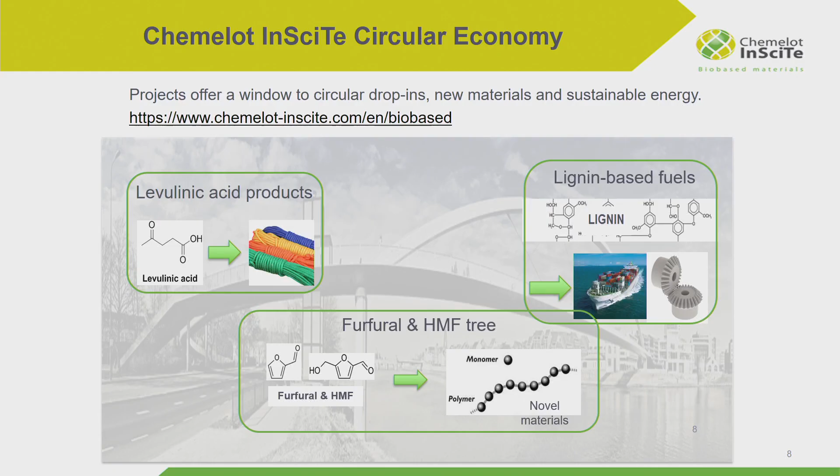We can go to lignin-based fuels. Lignin is often a critical, let's say, a fatal raw material, but if you can liquefy it, you can make ships sail on this. We can also valorize hemicellulose by intermediate furfural or hydroxymethylfurfural, making very special polymers.

We can think about high performance bio-based polycondensates with smart additives, making them stronger with high tensile strength, for instance, but other properties as well.

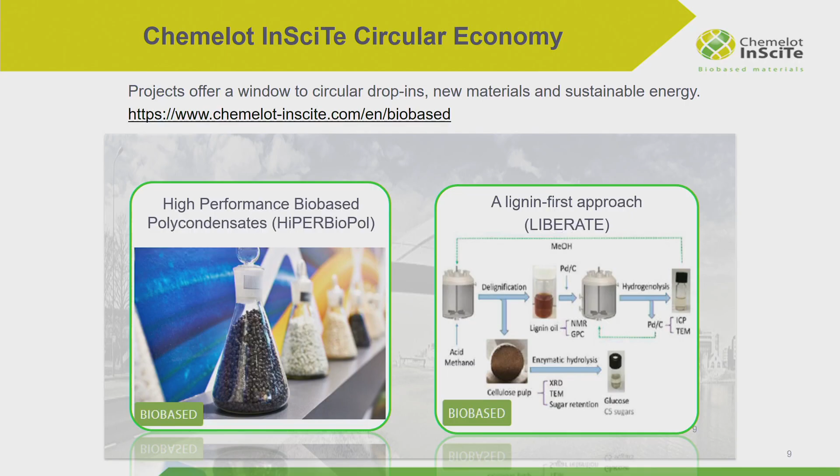Lignin first approach resembles the paper industry, but now not cellulose, but lignin is the most important starting material, and also there we can make great things from this. This project is successfully running at InSciTe.

We can think about bio-based and circular engineering plastics. That is, to start with recycled PET from bottles and upcycle this by putting in nicer soft blocks so you can make better quality plastics out of this back again for reuse.

And we have also lignin, but not as a fuel, but also as a plasticizer where you can mix it with other materials. So this is just a very short view on the projects InSciTe is doing.

The other company I'm representing is InnoSyn. InnoSyn is, let's say, the chemistry competence of DSM, which became an independent company 3.5 years ago. And InnoSyn has a number of expertises.

We do a lot in catalysis, biocatalysis, homogeneous catalysis, heterogeneous catalysis. We combine this also in flow chemistry, where we can design complete reactor systems. We do photochemistry, we do special crystallizations, also for pharmaceutical products. But last but not least, we are also driving the bio-based and circular expertise at InnoSyn.

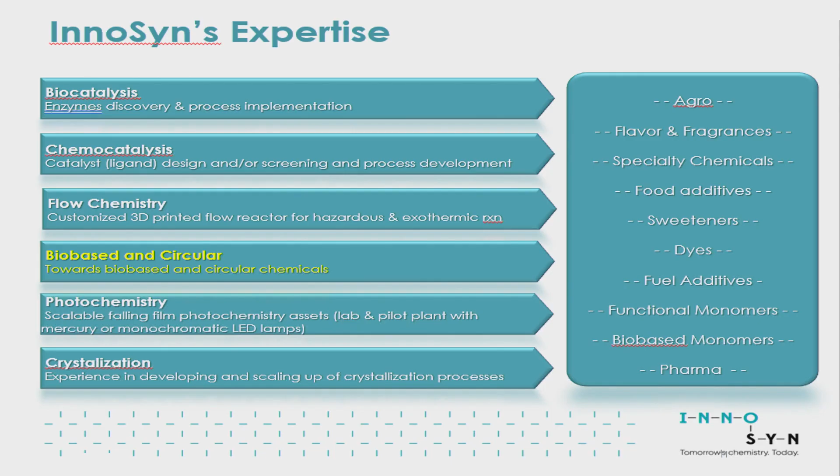And you see on the right-hand side of the slide, there's a lot of customers. InnoSyn does chemistry. InnoSyn is a one-stop shop. We start with ideas, but we can take the ideas up including implementation in chemical plants because of our industrial expertise and experience.

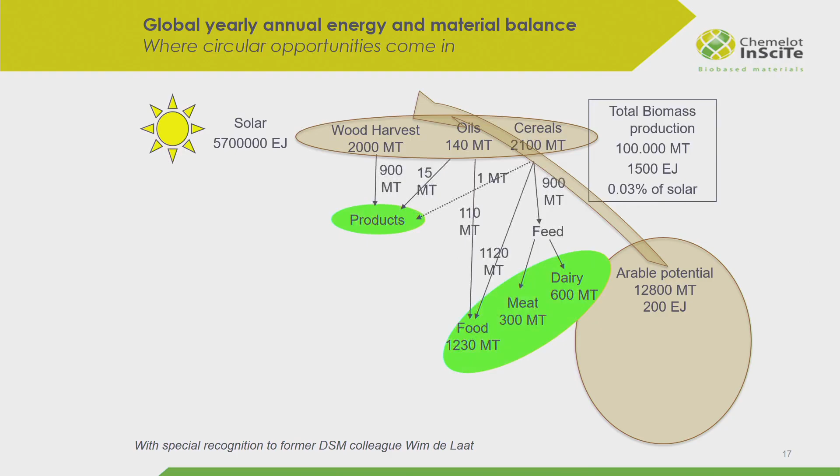This arable potential is also, again, a small part of the total biomass production. And from this arable potential, we create our food and our materials. At least we did that 2 centuries ago. And this goes to products, to dairy, to meat, to food, houses, building, etc.

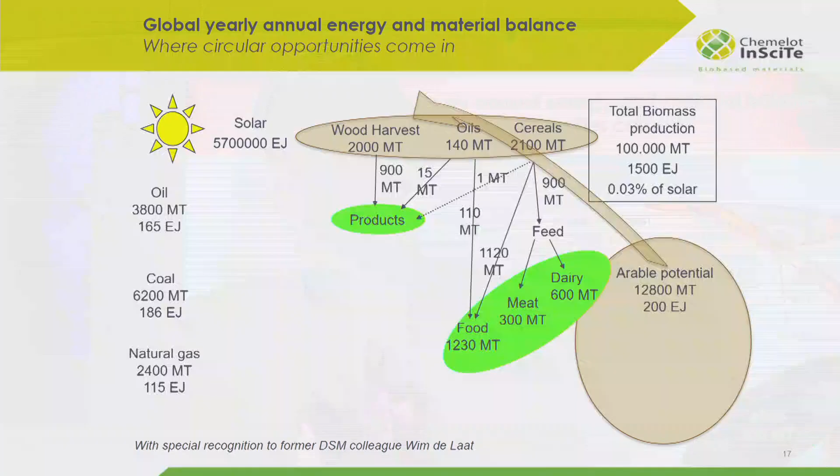This was about the situation around 1815 or 1900 or something like that. Then we started digging and drilling, getting in fossil feedstock - oil, mineral oil, coal, and natural gas. And these resources are at least serving a lot of our energy and some products - heat, also liquid transport fuel, and also some products like plastics, etc.

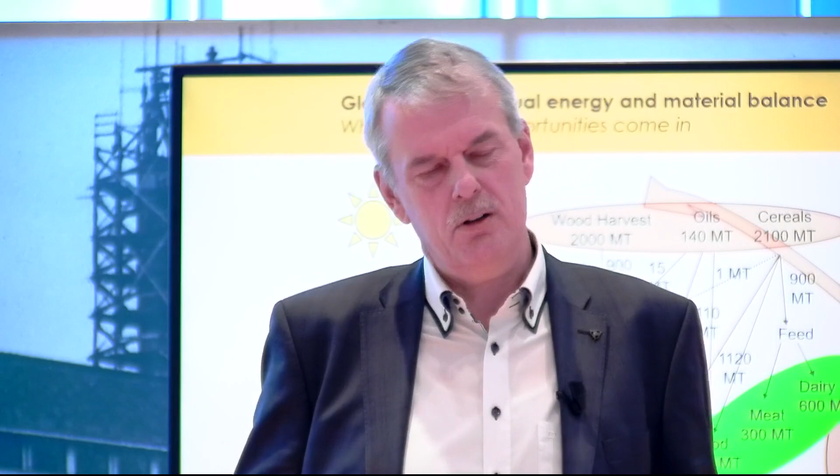So we started, and it's really starting, to have some green electricity - hydro, photovoltaics, windmills. That's about the situation today. We also like to use bioresidues, the fatal biomass, which is, I would say, not really useful for other purposes. And I think that's a very big opportunity.

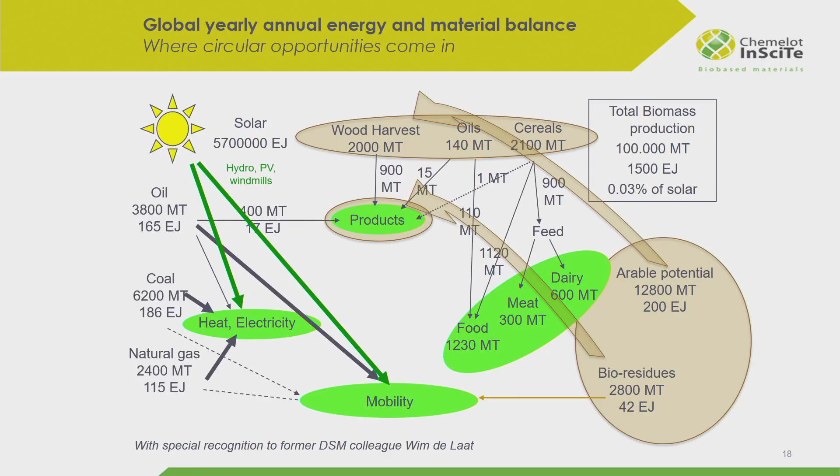If you're going more and more circular, the red arrows will disappear. We will not use energy from the land anymore. We will go to electricity and mobility directly created by the sun. And if we do that, it becomes more and more, and in the end, also the fossil needs disappear. So this would be the idea of a really sustainable world. Energy comes from the sun, materials come basically from biomass or circular sources.

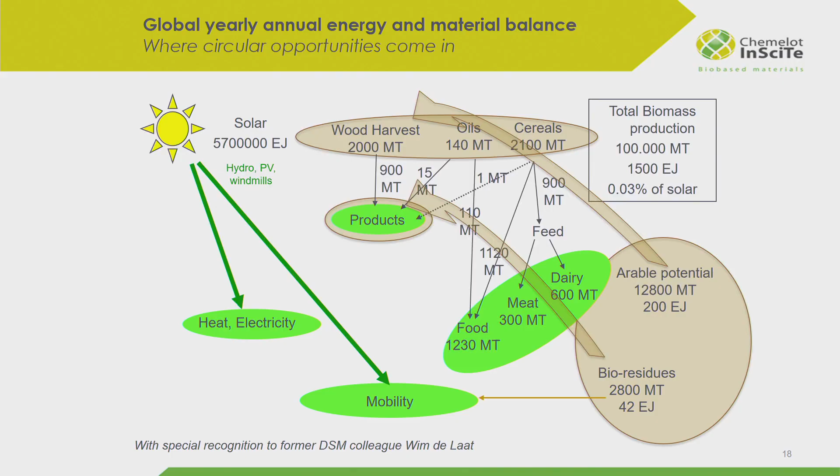Looking at feedstocks, we have a lot of bio-based and circular feedstocks available at our disposal, enough to serve our material needs. Think of woody biomass, lignocellulose. I'm not talking about trees, I'm talking about forestry and management, meaning that we are well maintaining the forest. If you maintain the forest very well, it does produce a lot of branches or dead trees. And these, for chemistry, it doesn't really matter. You only need the structure from these trees. Natural oils, aquatic...

Seaweed, for instance, or algae. Biodegradable residues, like what you throw away at home - let's say the leaves from the food, etc. Plastic recirculates, municipal solid waste, side streams of processing industry, also paper industry. There's a lot of useful side streams for chemistry. And last but not least, engineered recirculates.

That's really what's called assemble to disassemble. So if you're putting together a product and you're thinking ahead, it can be easily taken apart - it becomes also easier to recirculate and use it for high value applications again.

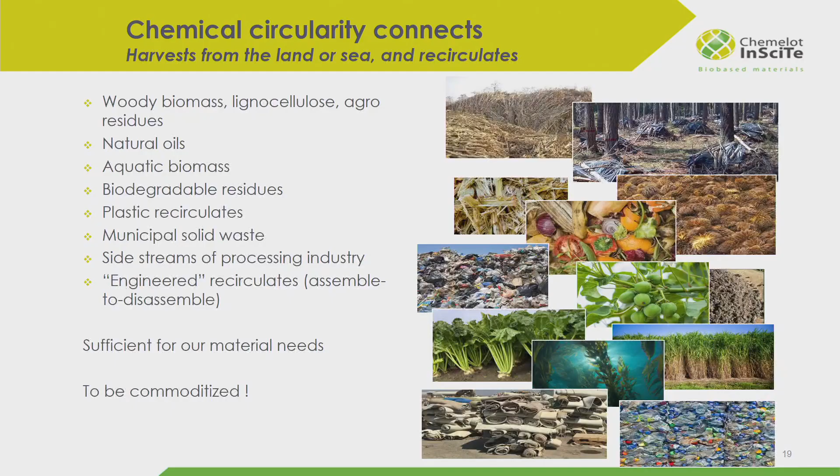Yeah? These feedstocks look very nice, but they are quite voluminous, and they are not very stable. If you leave them on the land, most of them rot away. And rotting away means methane creation, which is a lot more damaging gas for the climate than CO2, about 25 times. So that's not the way it goes.

So if you are not allowing this, and you're processing this to commodities, densifying it so it can be transported, then you're making a good step. And that's really the gate for access to the chemical industry. I will come back to this later. So if we have these bio-based biomass and bioresidues, how can they connect to chemistry? Well, I have a number of examples.

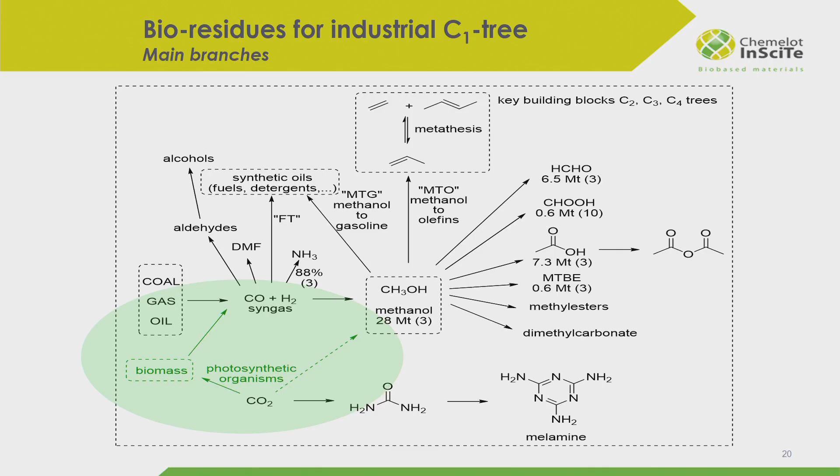This is what we call the C1 tree. This goes via methanol, so you can make synthesis gas, then make it into methanol. Methanol is a point of entry to the key building blocks from which we make plastics, a lot of volume. The very nice story here is that this is also a very economic route. We can make green methanol as cheap as today's, meaning we can make a transition without too much variable cost. You have to add a lot of capital, of course, to make it happen, but it is quite possible in the end.

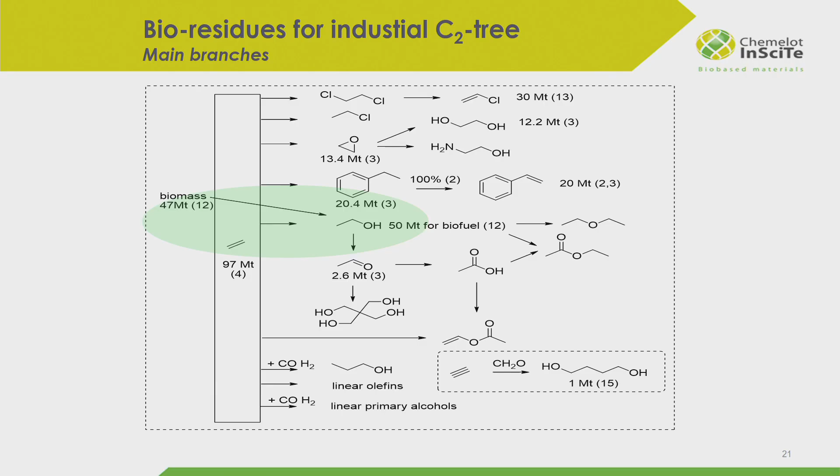The C2 tree goes primarily via ethanol. Ethanol can go directly to a number of specialties, but mostly you need to dehydrate it to move it back to ethylene, and ethylene is a component very well known in the fossil industry, which can also connect over there.

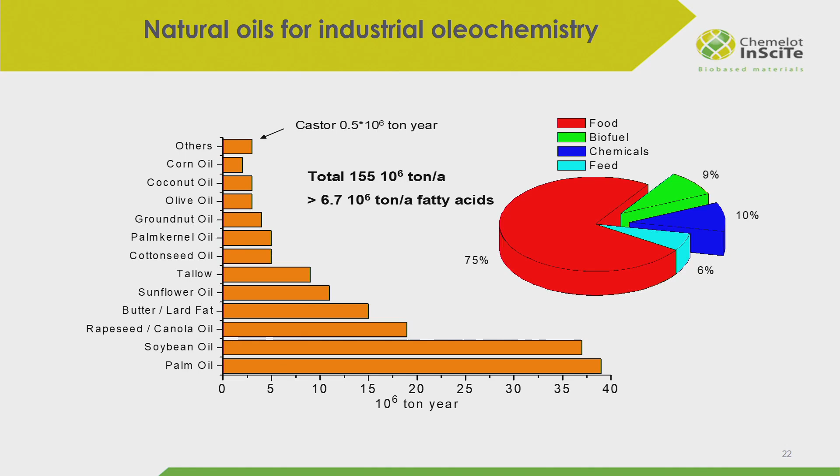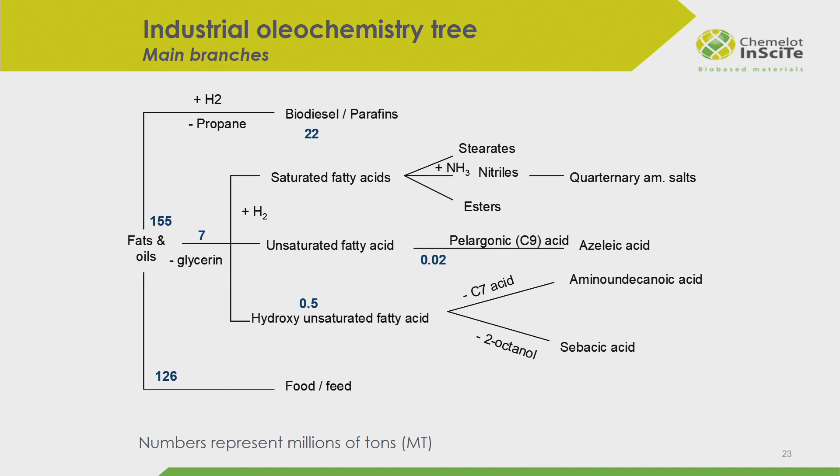We can also think about natural oils, meaning a lot of food, of course, which is not what you would like to touch upon. But there are some oils which you cannot eat, for instance castor. 10% of it is already dedicated for chemicals, and if you see what kind of tree this feeds - and that's only a small example, the tree is much bigger than this - you can make C9, C10 acids from this, like azelaic acid or sebacic acid, and also a lot of other specialties, which is, I think, a very nice bio-based entry point for the chemical industry.

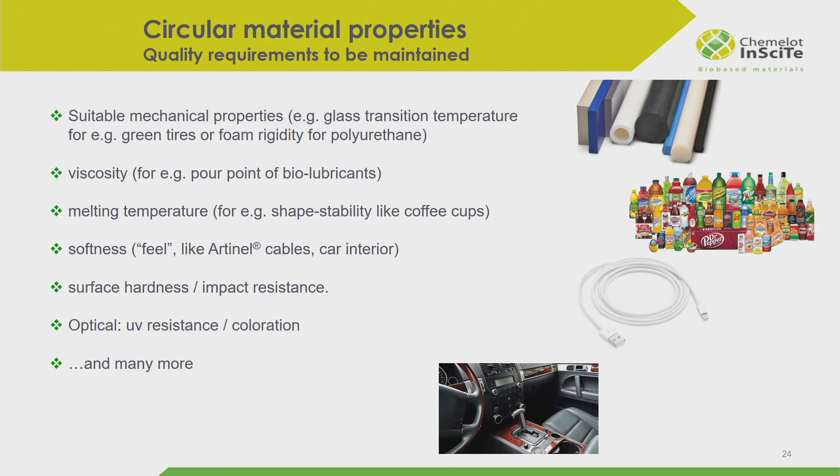And in the end, this goes to materials, and these materials have a lot of properties and quality demands, and they are pretty stringent. You can think about packaging, cables, car interiors, or insulation stuff, etc. But the properties must remain the same. So you can go bio-based, yes, but in the end we want the same chairs, the same tables, etc., and the same car interiors without any quality deterioration. And that's, of course, a very good challenge.

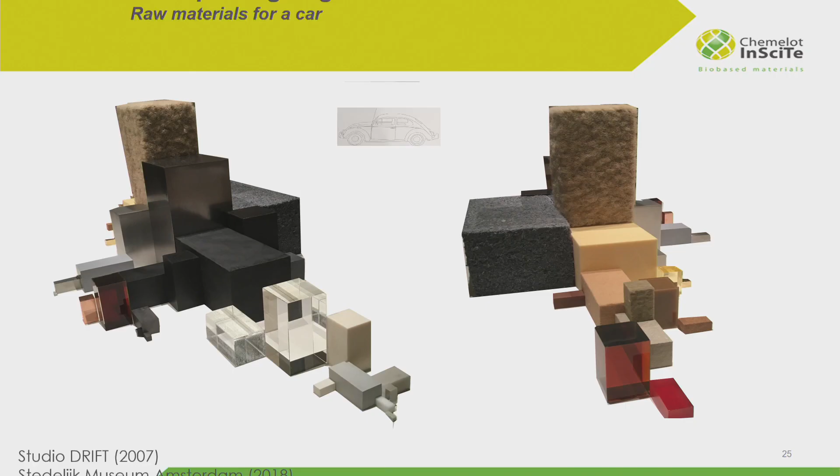An example is - I like this picture. I was some time ago in the Stedelijk Museum in Amsterdam, and they had a nice exhibition about raw materials. This is a picture taken from two sides by me, and it represents the raw materials of a Beetle car. What this company did - these are really artists - they took a Beetle car apart completely, separated all raw materials, and collected them in these cubes. This is then presented. They did a lot of other stuff, other user goods, but this is the way it goes.

Now, the nice thing is that they also add a list of raw materials in weights and kinds. And from this list, well, we have an educated guess of what is the carbon footprint of each raw material of this list. Iron ore, for instance, must be gained in a mine, purified, transported over the world, go to steel making, and do a lot of things over there as well. So it has a pretty high footprint.

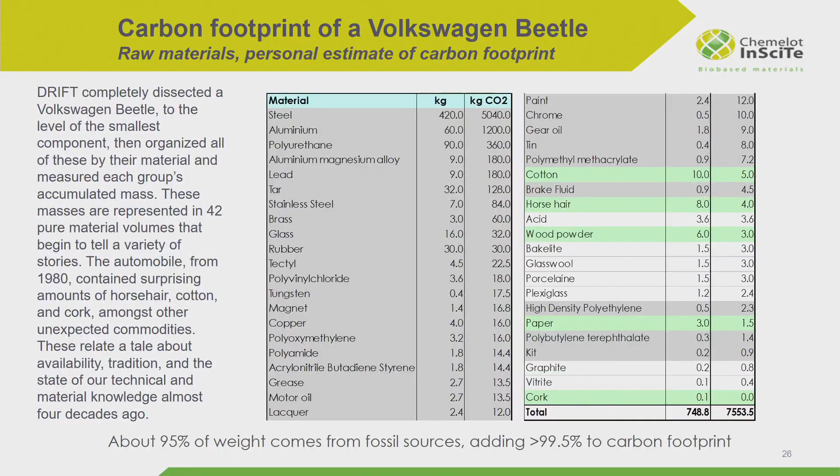And if you add all these things, you get a list, and then you could already conclude that about 95% of the weight of that Volkswagen Beetle came from fossil resources, only 5% from other sources. And the carbon footprint is caused 99.5% by fossil resources. So in the end, on the right bottom side, you see two figures, and this concludes that 1 kilo of that kind of car will produce about 10 kilos of CO2 in the atmosphere.

So what is now the road to circular materials, and how does circular complement bio-based? I like to put this into this picture, and again I was inspired by a former colleague, Gerard Werumeus Buning. In fact, when you start with a fossil raw material, you start with a carbon footprint of 3 - I'll come back to this number, it's a very easily derivable number. In the first steps of the chemical process, you go from fossil raw materials in the end to user goods, but in the beginning you create a lot of footprint and you do not create a lot of value.

When this process proceeds, you create more and more value until you get your good. But if you are combusting it, which is what we do today, you actually destroy value. You just recover a little bit of energy, but that's really not much.

What you can better do is go bio-based. You can make naphtha, base chemicals, or monomers from bio-based sources, and then you already win at least 3 kilos of CO2 per kilogram of product.

You can also mechanically recycle it—that's the blue area, the blue arrows. On the top right, you can go a bit fiercer with chemical recycling, where you really take the monomers apart. And in the end you can go even more fierce, almost like burning, but leaving out a little bit of air—that's pyrolysis and gasification.

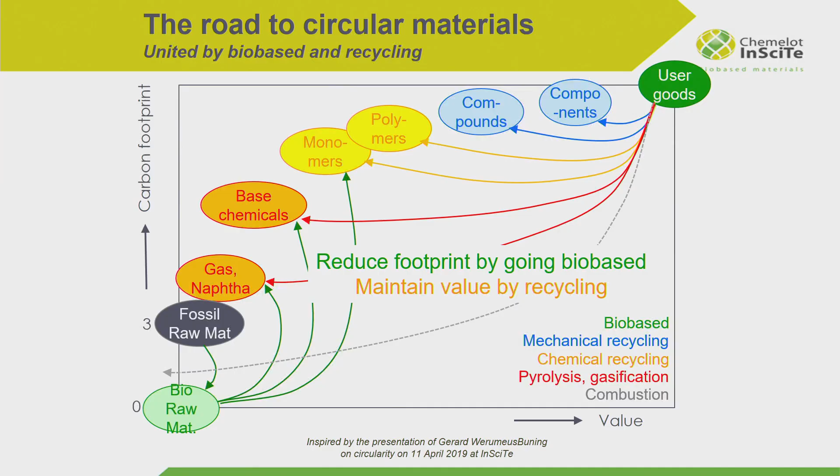This is how circular recycling and bio-based complement each other, and this is what makes sure you create the most value. If you first go bio-based, you can reduce your footprint, but you can also maintain your value through recycling—keep it up as much as you can. This is, I would say, the way we can really run this planet.

So what does a sustainable world look like? What are the basic insights I gained—these are all open for discussion, by the way. But these five items do at least make sense to me.

First, in a sustainable world, energy should come from energy sources, and materials should come from material sources. That sounds very logical, but trying to make products from electricity is actually economically less attractive. That's what I found out, again, during a lot of discussions with other people.

Energy is by far the cheapest sustainable source. Electricity is by far the cheapest sustainable source—that's also very important to know, and it's also very good news, by the way. So you should maximize electrification.

Of course, there's one exception. Electricity takes batteries, batteries are heavy, and you cannot take them into the air—this calculation doesn't fit. So you really need kerosene, the fuel for aviation. These can be made from bio-based sources, but it's only a small amount related to the total fuels we are currently using in the world, about 7%.

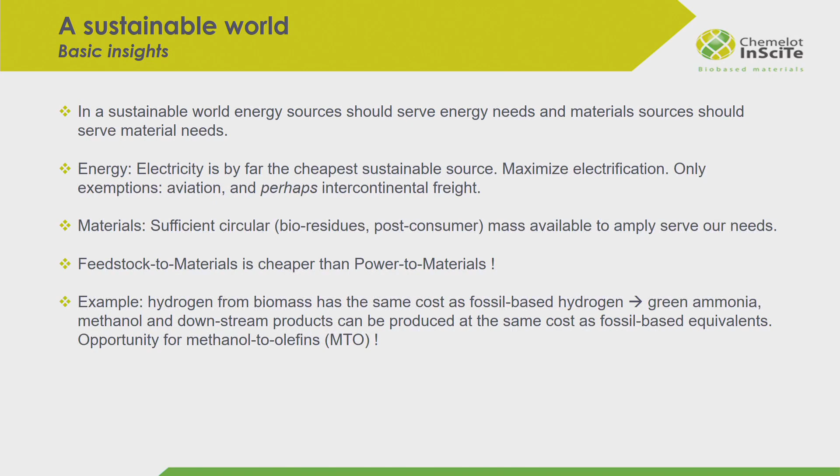Feedstock to materials is cheaper than power to materials, and as an example, in the next slide I'll show you that you can make hydrogen from biomass and hydrogen from other sources, and compare them. Hydrogen is a very important intermediate for methanol and ammonia, which go into other products. There are much more extensive studies available with many more technologies, but this one I could create because I know a little about green hydrogen from electricity.

I also had a very good discussion with Torkol and Torrgas, and with the BRI2 project, which claims that hydrogen from biomass is very interesting—not only in cost price, which is about the same as current cost price at maturity, but especially in carbon footprint.

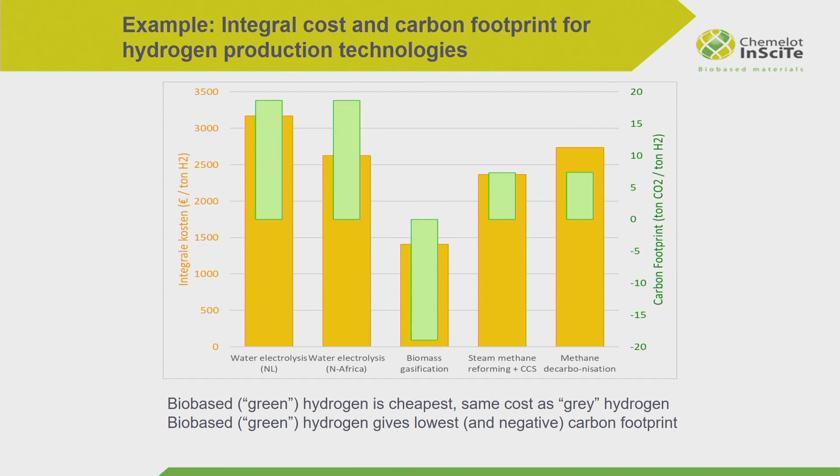It's not carved in stone, but for me all this evidence is piling up, and I would really like to see new projects coming with green hydrogen.

So if you are going from bio-based value chains into products, you start with biomass—very broad, it can be anything: lignocellulosic, natural oils, the whole list I showed a few slides ago. This biomass should be treated so that the most valuable products are taken out first, like the crops and proteins—that's normal agrochemistry or agricultural operations. But at the end, you will always have residues in your hand.

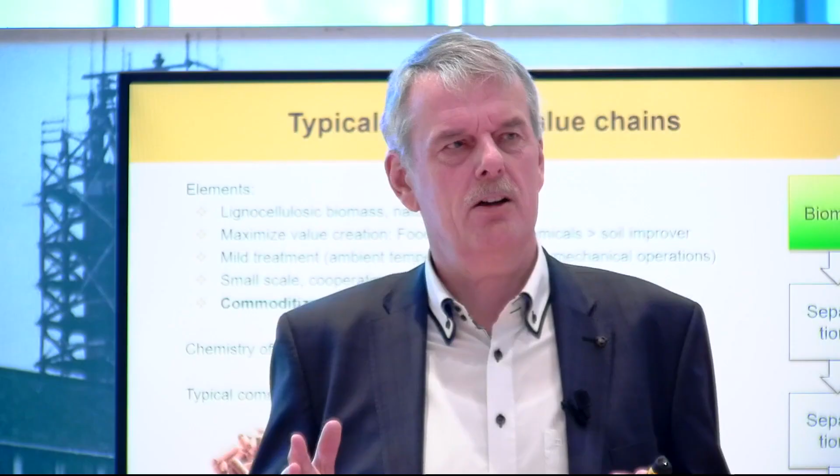These residues can be commoditized and separated into, for instance, feedstock for chemicals—typically carbohydrates or natural acids—or used to make soil improver, carbon, or salt. At the farmer level, this is typically a small-scale operation: you do your crops and process your residues with a mild treatment, mostly mechanical, like sieving, milling, or filtering.

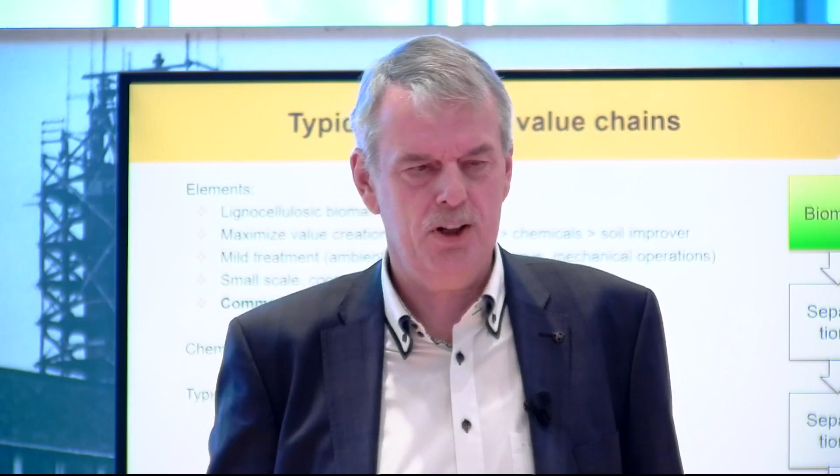Meaning aqueous, low temperature, no acids, no bases, no chemistry. That it's very cheap. These plants are really inexpensive, related to the steps after. Then you bring your residues to a typical chemical site, and there you do the chemistry. And why? Because of economy of scale.

Because these installations are darn expensive. You use solvents, you use acids and bases, you use high temperatures, high pressures, and all that must be operated in this plant. So that's why you bring this together. But for bringing it together, you need to transport. You need to commoditize.

The chemistry would like to have all year through access to the same quality of raw materials. That's the way we operate, and that's possible. But you need to commoditize. It has to be, of course, good price.

But if you are making it more dense, the logistics become cheaper. In one lorry you can take much more kilos of biomass if it is densified than when it's not, and then you can make some good economics out of this.

Examples of commodities, from the whole picture list I showed you a few slides earlier, you can think about pellets, wood pellets. You can think about oils like naphtha, bio-naphtha, or melasse, when it is sugar. These are just depicted on the left bottom side.

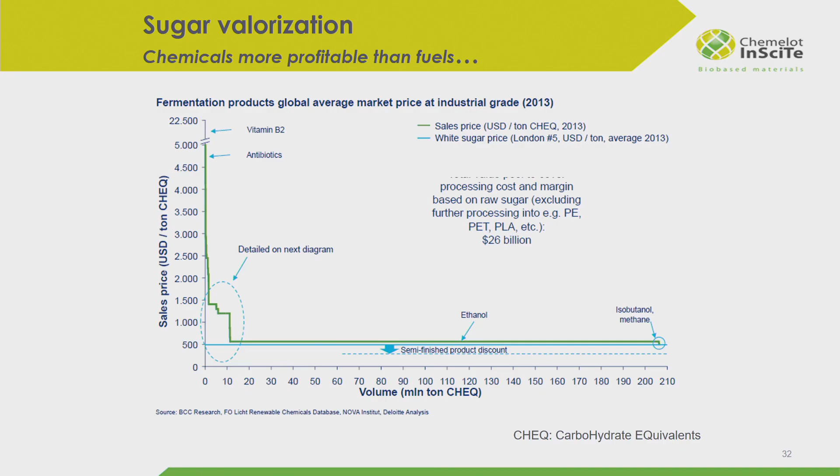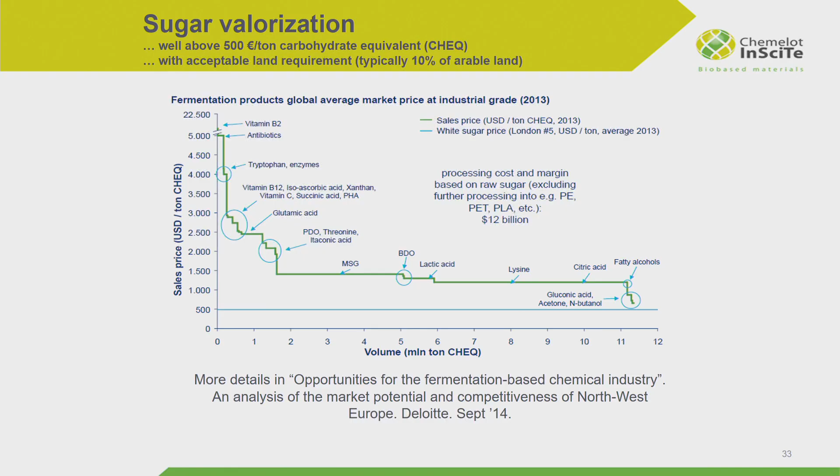But on the left-hand side, you see still basically a lot of fermentation products which are still interesting. I investigated already in the past succinic acid, as told in the introduction. But you see here there's a lot more valuable materials you can make, you can create from sugar by fermentation, and this is just an overview. So I think fermentation is a very important area to green your processes, because they use sugar anyway.

Now I come to this example of this deeper dive. I will not dive too deeply with you, otherwise we will run out of time, of course. But first of all, I really like this picture because from wood you can...

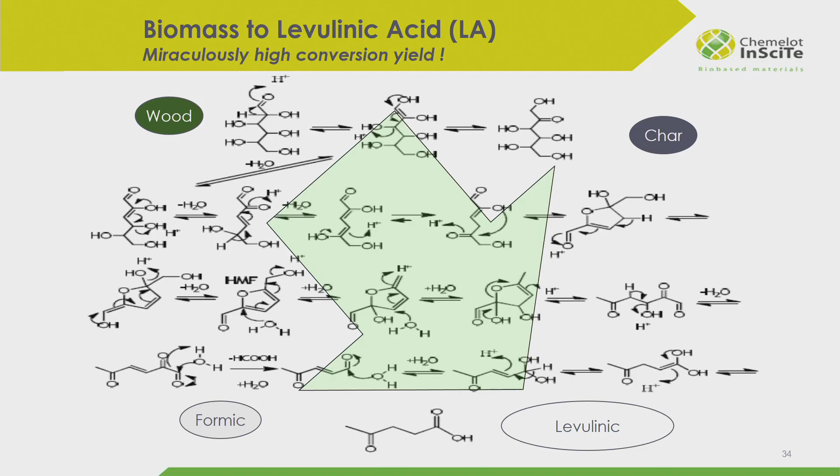From the sugars from wood, you can make levulinic acid in an astounding, I would say, efficient way. About 7 out of 10 sugar molecules are converted to levulinic acid via this very comprehensive scheme, while also co-producing char and formic acid. And this can lead to a lot of value creation, and this is what we would like to, what we also investigated in DSM, and we came with this kind of process.

You come in with biomass. You will add some acid and some water. You cook it, like in the paper industry. You make your levulinic acid.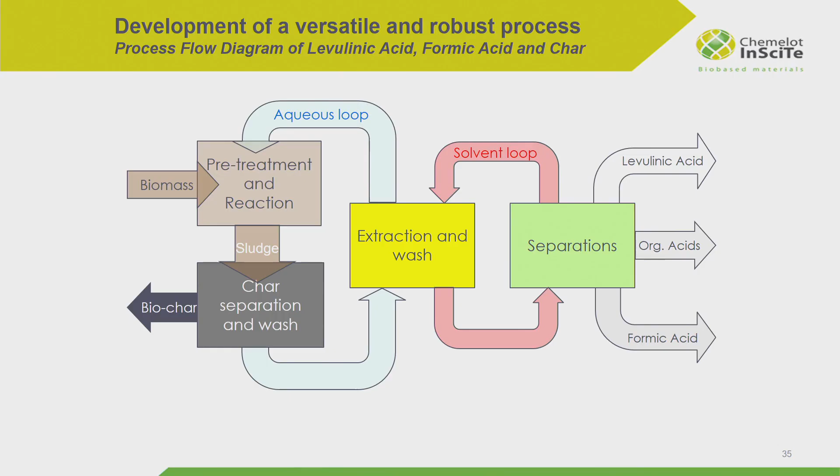You separate your char, extract your products, and distill them off, and you make levulinic acid, organic acids, and formic acid. And of course, the cheaper the raw material becomes, the cheaper your product will become.

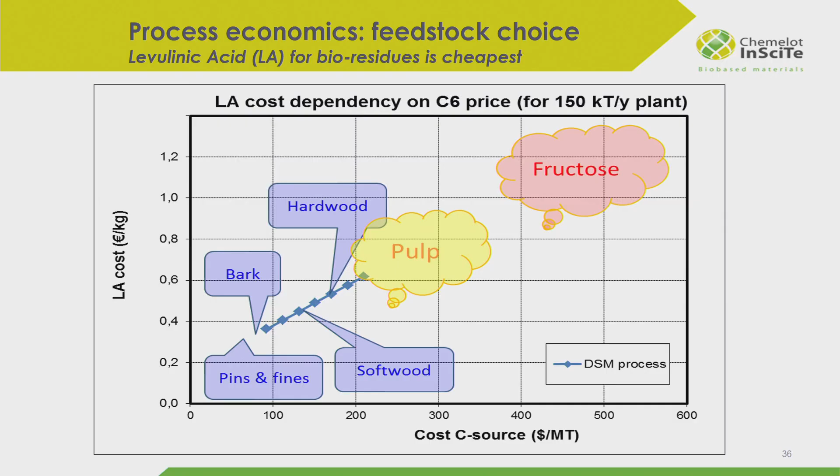That's also what we really recognize in DSM. We don't like to use fructose because fructose is very expensive, and that means your levulinic acid will be expensive. Pulp is better, but not good enough. If you go to woody biomass, especially the rejects, like the residues, the pins and fines or the bark, which are not of much value, then you can really come up with very cheap levulinic acid.

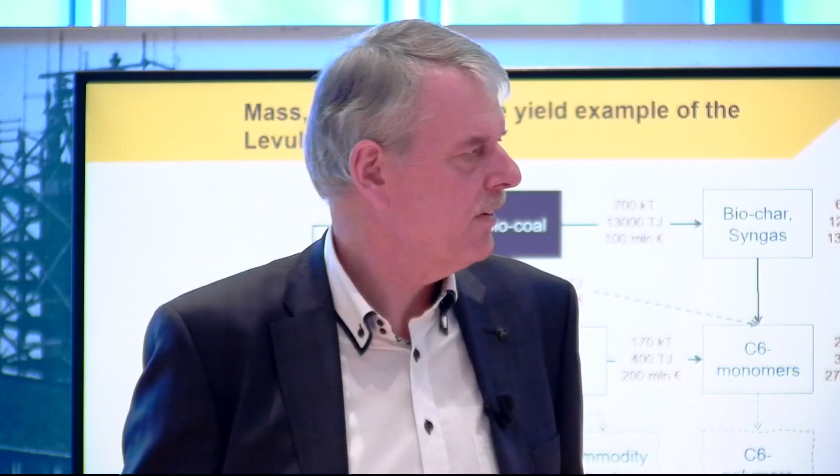And then you can create, I think, also a nice value, and that's also depicted in this graph. When we start with commoditized biomass, rated at €120 per ton, which is a fair price, and make via levulinic acid, formic acid, and biocoal, you make biochar syngas, you make C6 monomers via a number of intermediates. You see on the figures the volumes, energies and value, and you can easily deduct that you have a lot of value creation, about 250%. Every euro you put in, you create €2.5 of products, which I think is a very good starting point for a business case.

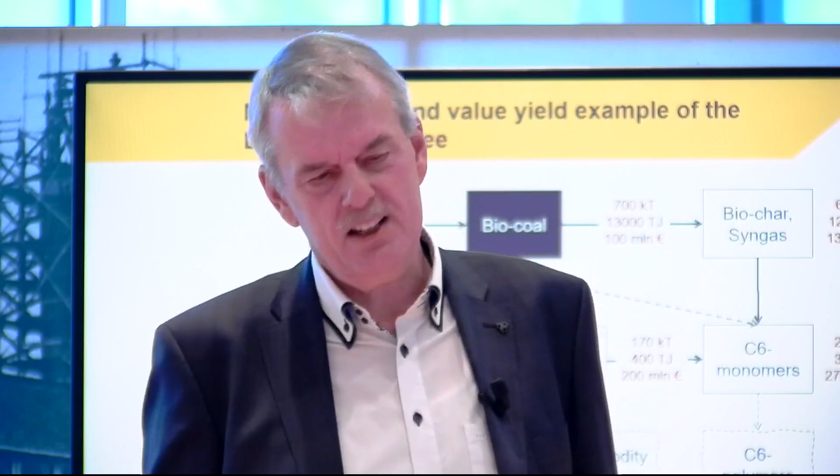And why? Because your energy yield is very good. 50% is a marvelous energy yield, and the carbon yield is really great. And that makes this value creation possible.

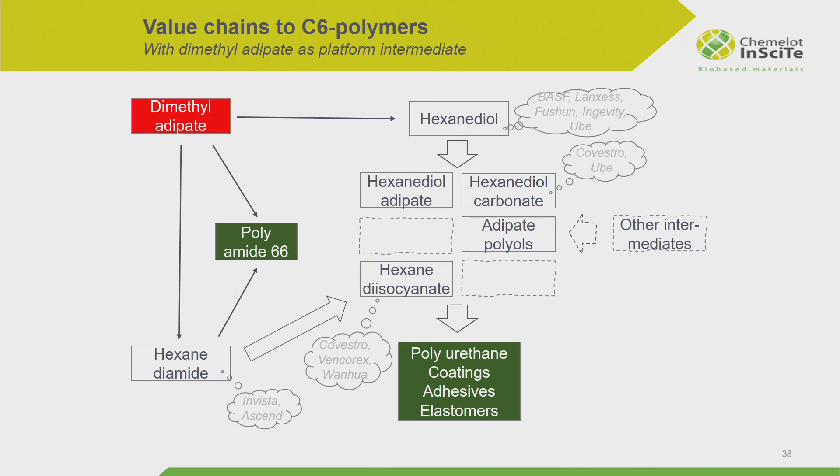Well, if you talk about C6 monomer, think about dimethyl adipate, you can go all kinds of directions to materials. You can make HMDA, hexamethylenediamine, you can make hexanediol, you can combine it to nylon 6,6, but you can also combine it with other intermediates to other polymers, like polyurethanes or diisocyanates, and these can be applied in polyurethane coatings, adhesives, elastomers, etc. This is, I think, very nice, and this is a very active project in InSciTe, and we really try to interest the industry for this.

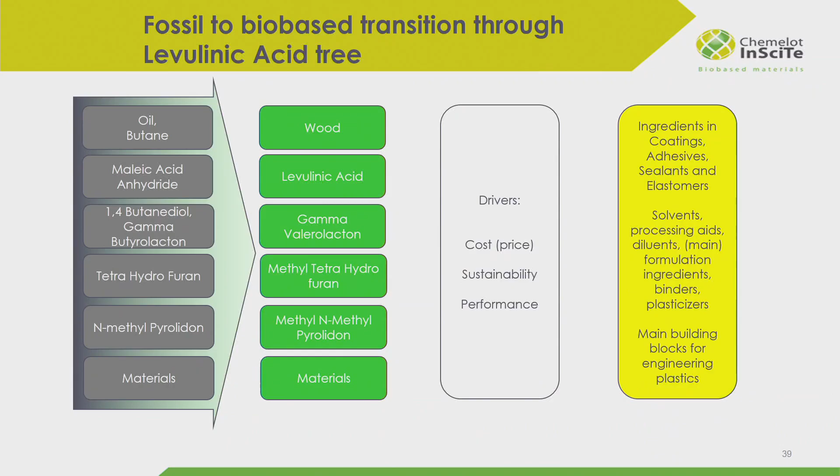So if you look here on the left-hand side, you see from top to bottom a value chain towards materials from fossil feedstock. The green ones are the bio-based equivalents, not exactly the same materials, but really resembling. What we like to do is make ingredients in coatings, adhesives, sealants, elastomers, etc., and make building blocks for engineering plastics. The driver to go from fossil to bio-based is, of course, cost. Often cost and sustainability go hand in hand, and performance.

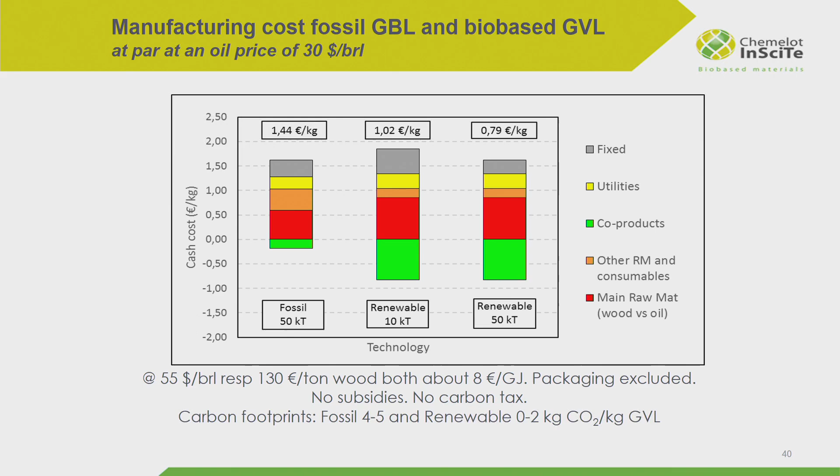And why is that? Because you make a biorefinery. You create a lot of other co-products which have value in the market. So that is the secret of the value creation. This makes it possible that you start from levulinic acid to make some intermediates which can already have nice applications, and you can grow towards bigger products like caprolactam, adipic acid, hexamethylenediamine, hexanediol, etc.

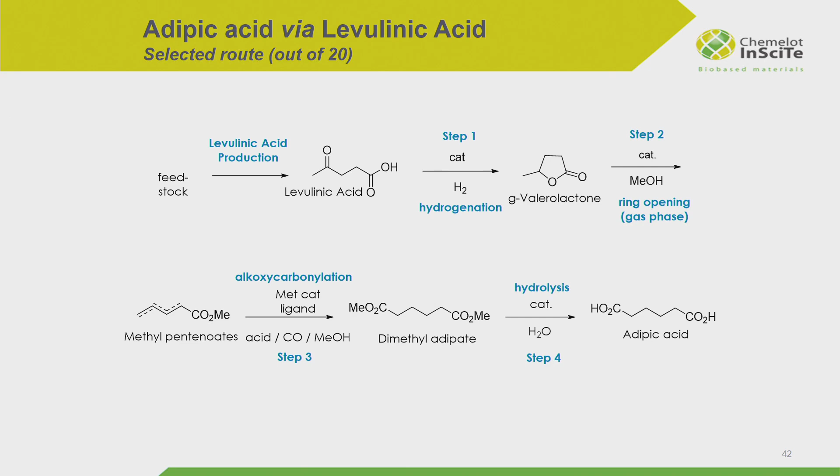Just one slide on chemistry, because it feeds the next slides as well. So we developed in DSM, from 2010 to 2013, this process, starting from woody biomass: levulinic acid, we hydrogenate it to gamma-valerolactone. We ring-open it to methyl pentenoates, the 3 isomers, and then we do a alkoxycarbonylation to dimethyl adipate, and then we can simply hydrolyze this to adipic acid.

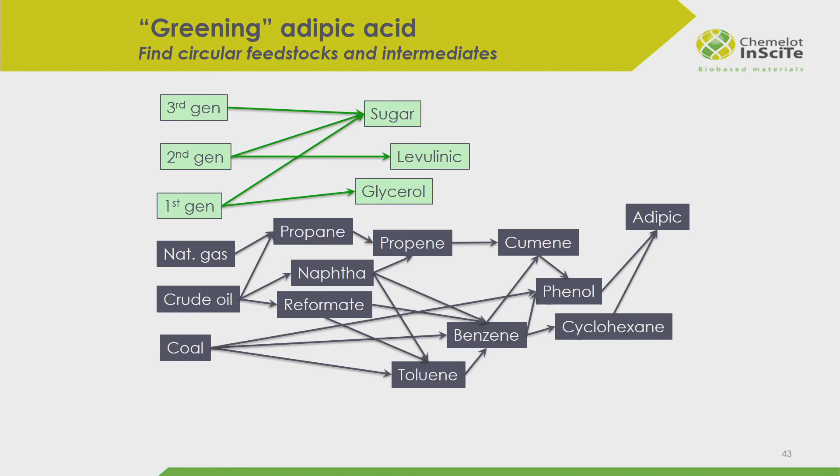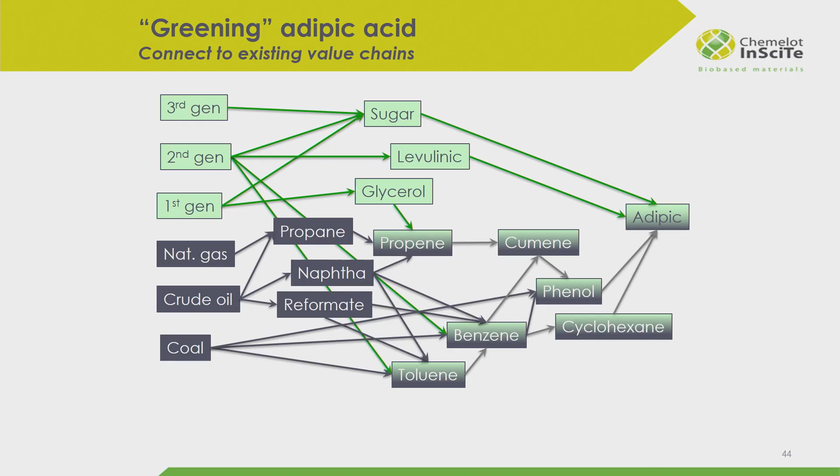And if you see how adipic acid was made in the past, it comes from natural gas, crude oil or coal. You have several routes to adipic acid. When you put the renewable adipic acid to it, then you see that sugar or levulinic acid can be a very good intermediate. I think sugar was some time ago a hype, I don't believe it's really possible with sugar. And then you can start with the interaction. The idea is that you're really slowly starting to replace intermediates with bio-based, greening up the processes in this way, and gradually your adipic acid can become green.

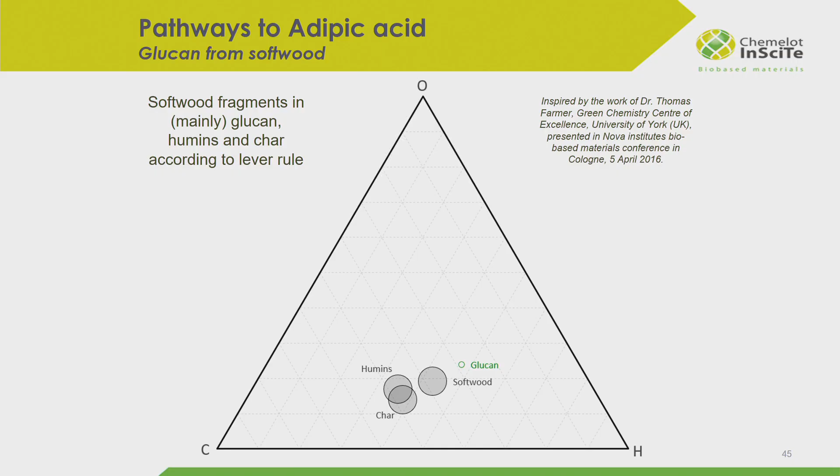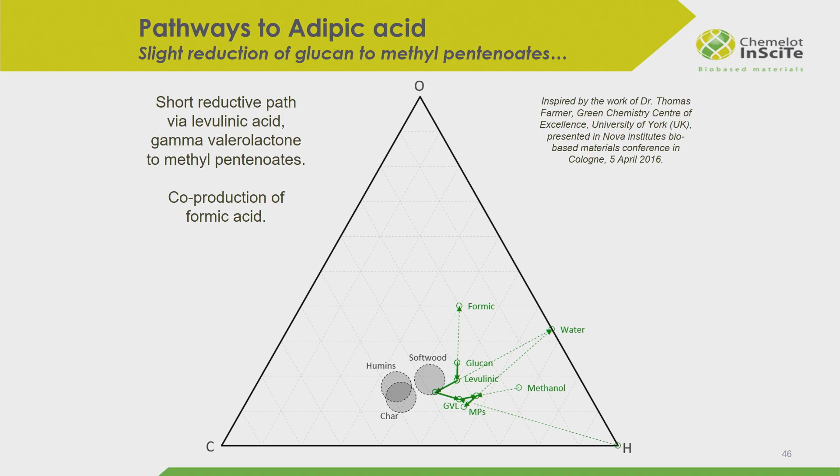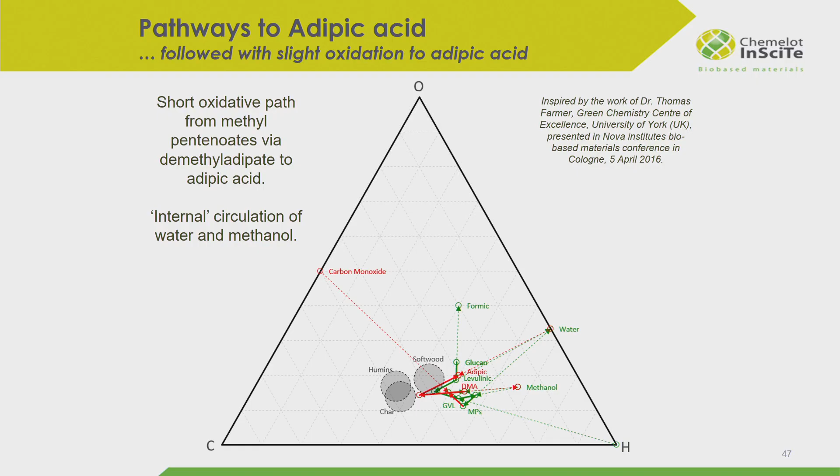What's nice is that you can really construct in this diagram your pathway towards adipic acid, starting from glucan, levulinic acid and formic acid, but also gamma-valerolactone and methyl pentenoates. You can continue with the red one - I changed color for clarity. You go via methyl pentenoates, dimethyl adipate, to adipic acid. What you see is that the pathway is very short: you don't have to oxidize a lot, you don't have to reduce a lot, you don't need too much additional raw materials, and you arrive at this.

By the way, I was also inspired to make these triangular diagrams because of the work of Thomas Farmer. He is at University of York. He presented a very impressive presentation where he has similar diagrams.

If you compare this with the fossil equivalent, you would start with reformate, go to the left bottom to benzene, then back to the right to cyclohexane, then to KA oil, and then to adipic acid. This pathway is about 3 times as long, and it needs a lot of additional chemicals, which is why it's relatively expensive.

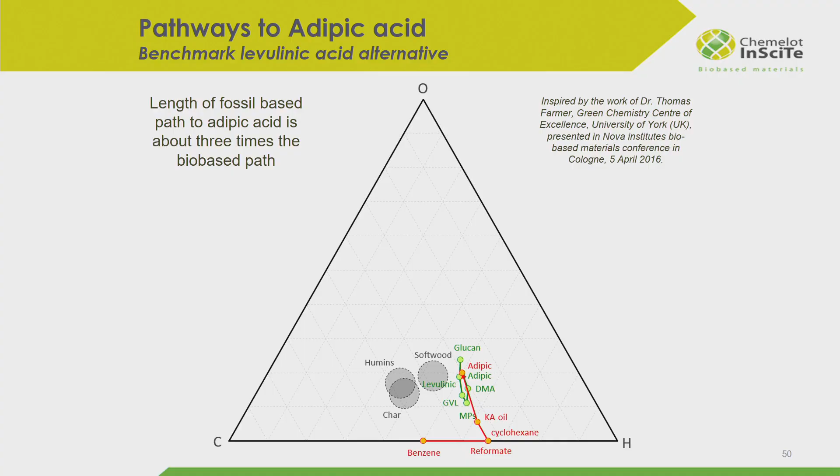So you can compare the two, and you see that the green pathway is a lot more attractive than the red one. You can see this reflected in variable cost.

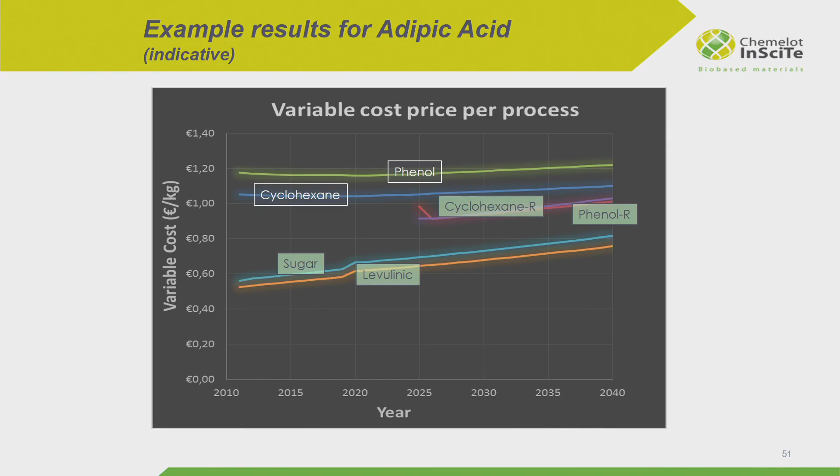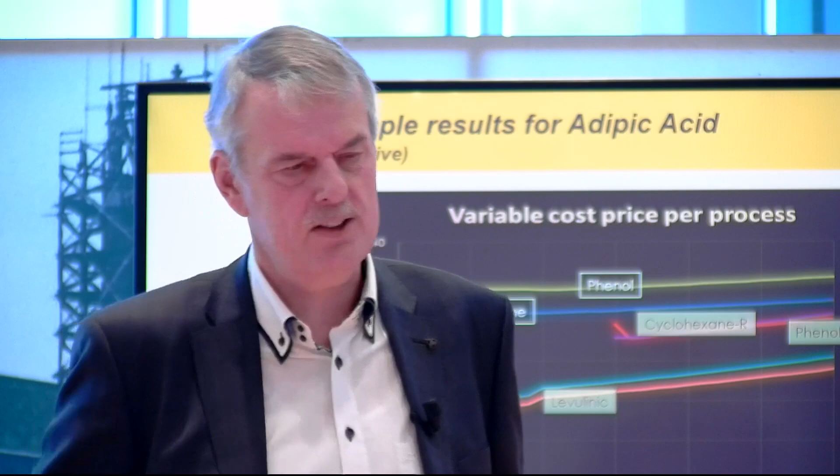We developed a model for that at DSM, which is of course very indicative - there's a big database behind it. You see that the cost price of cyclohexane-based or phenol-based adipic acid is around €1. You can green the cyclohexane and green the phenol, and then you have a little advantage. But if you reconstruct the whole chemistry and go via, for instance, levulinic acid, you'll get the best cost - about half of it.

The good news is the same holds for carbon footprint - often cost and carbon footprint are interrelated. So there too, levulinic acid and sugar are very interesting. You'd expect, because of this, that the market share of phenol-based or cyclohexane-based adipic acid will decrease in favor of the sustainable routes.

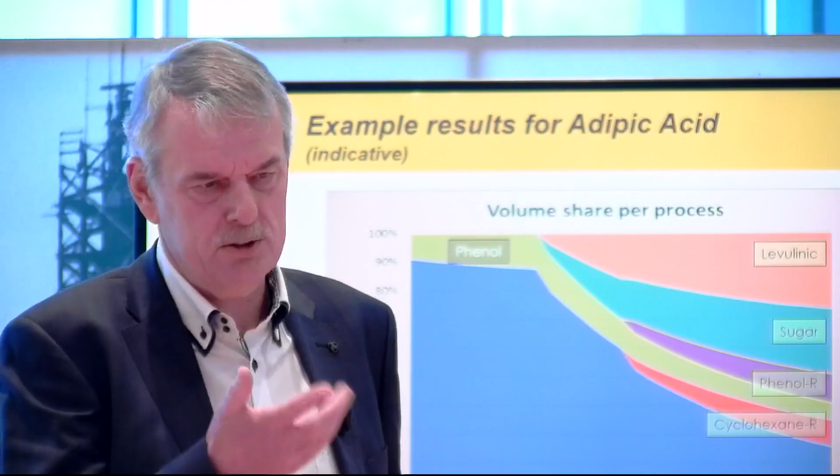Of course, the speed depends a lot on policy. The greener the policy is, the faster it goes.

Now, with the whole database, we can make some predictions. We had about 60 molecules we considered, and on the y-axis, the vertical axis, you see what kind of increased renewability we could expect every year. So the higher the bar, the more the process is prone to transition.

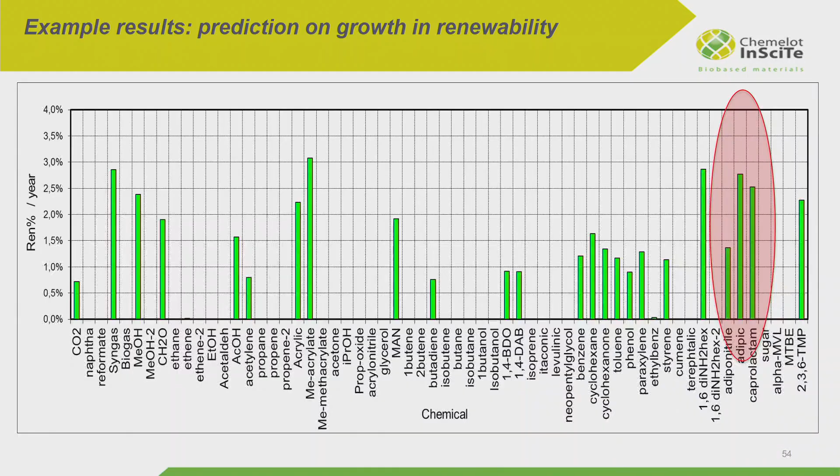So we just discussed the caprolactam, adipic acid, adiponitrile, etc. route, but you see there's a lot more opportunities - a lot of greening potential going on there. Yet it still hasn't happened. And why not?

That is of course the famous valley of death. You need a lot of money to build your plants, to do the piloting, etc. It takes too long, the incentive isn't there, there are no partners who can really go with you, supply assets have nothing to offer. That is where a lot of projects stand now, I would say, at the bottom of the valley of death.

It's not very positive news, I would say, but I think we are really at the beginning of this transition, and we should really do our best to make things happen. And we can do it.

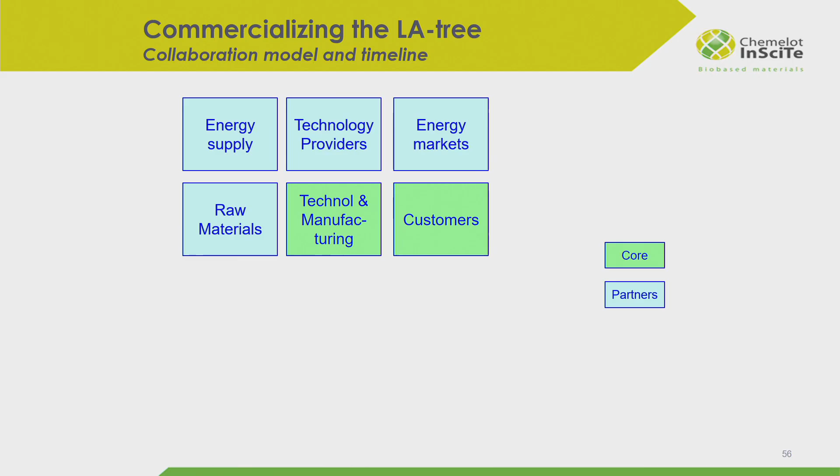If you are commercializing the LA tree, you think about technology and manufacturing of course, but you also think about customers - without customers, you can forget everything. So that's your core. You add your partners in energy, in raw materials, in technology, and you need a lot of support from all kinds of groups wanting society to make this happen.

And we see now there is some movement. We have very nice advice from our Social Economic Council in Holland. But in the end, you need this open innovation - that's really what you need, an excellent environment to make that happen. We are very well equipped in Holland, at least in this area, in Chemelot and Brightlands, to work on this, and we can really bring together partners across the whole value chain. That's what we need to make it happen.

From a technical perspective, I keep saying it's possible. We don't need time until 2050, not at all. We need 15 years. If we technologists say 2035, we can do it. But then all the lights must be on green, that's for sure.

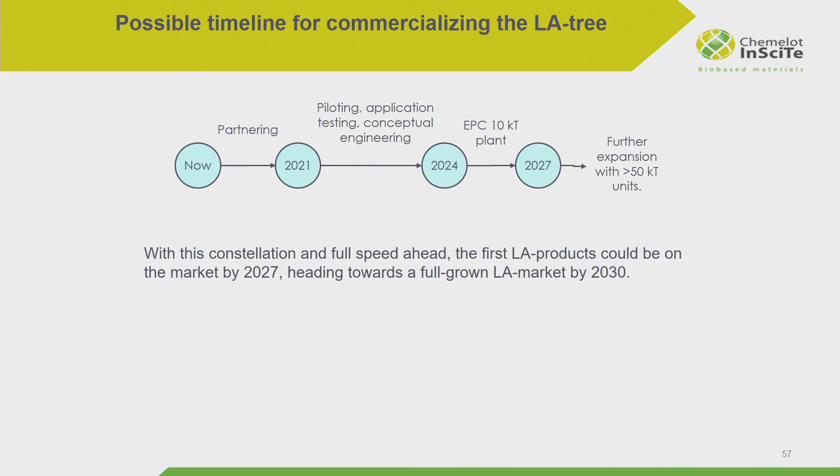The question is, of course, who wants to become a player? My opinion is that also such directions must be governed, must be set out by governance. So you cannot just ask industry, please green up your process, and then they say, yes we do, and in 10 years you're done.

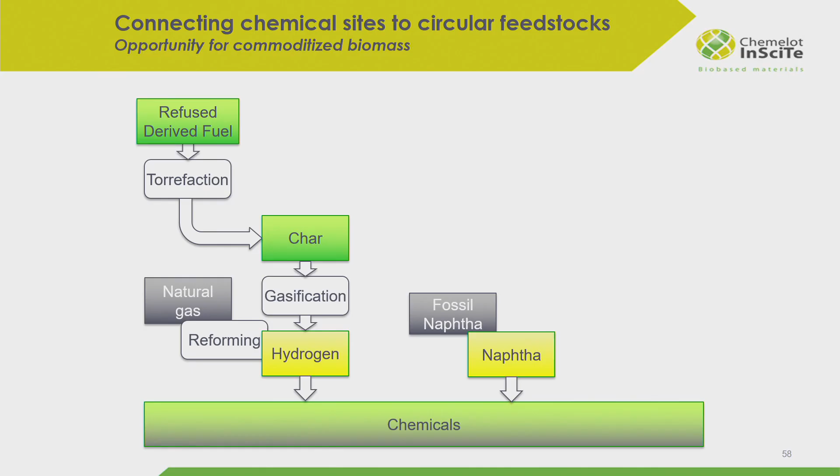Looking at chemical process industries, we have typically, example Chemelot, but I'm sure there are more sites like this, natural gas and fossil naphtha as our main feedstocks. How to green them? Now, of course, you can start with, let's say, refuse-derived fuel made from what you throw away at home. You can torrefy it, make a char, and this char you can gasify, and you will have your hydrogen.

That's one way. A second way, there are more, is that you use plastic waste. Also in Sabic we have some nice examples of this: catalytic pyrolysis, making char, also making liquid naphtha. Or you could say, like the levulinic acid case, you start with primarily biomass or a biofeedstock, catalytic conversion directly into chemicals and char, and this char you can gasify again. In the end, you can make the circle complete, make the transition complete, and be independent from fossil resources.

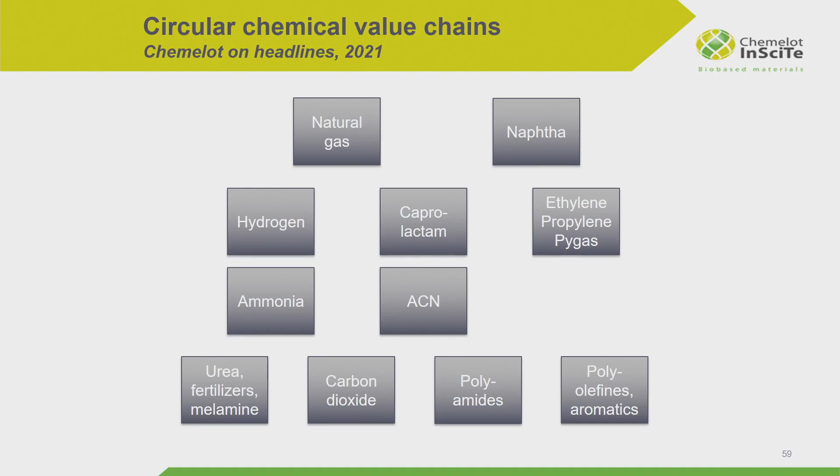So for Chemelot, it looks like this. We have natural gas and naphtha. We make hydrogen, ammonia from this. From ammonia we make caprolactam, acrylonitrile. From naphtha we make ethylene, propylene, pyrolysis gas. From ammonia you can make fertilizers, melamine, carbon dioxide comes also with it, polyamides and polyolefins.

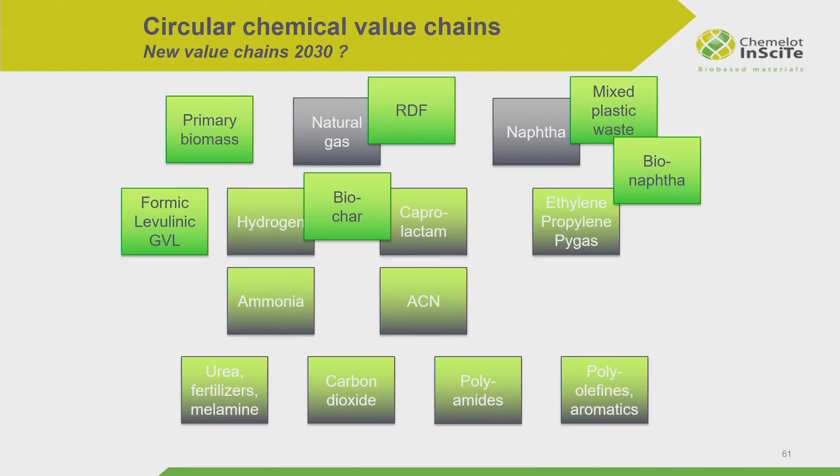Now, how to green it? Well, we can start connecting with biomasses. Then we can make the intermediates green, and in the end the plants, let's say the ammonia plant or the fertilizer plant, can stay the same because you just replace their feedstocks. That's all, that's the good news. You don't have to build the plants up again, we can keep using the assets. And in the end, perhaps in 2050, that is the ambition at least, we are completely green.

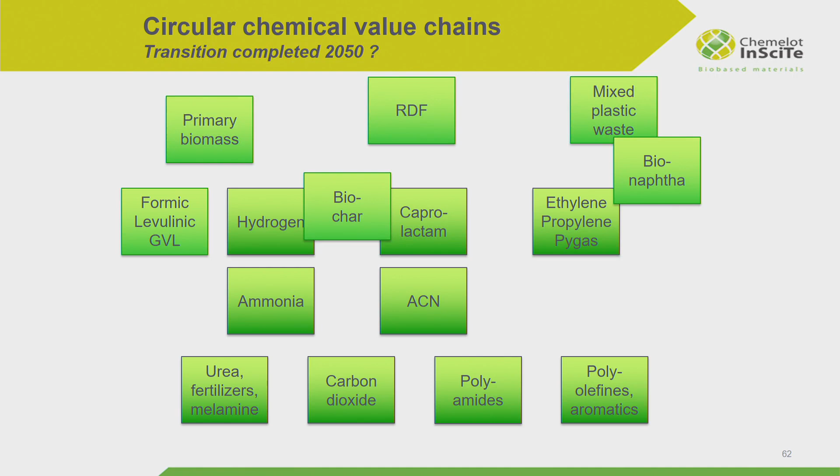So what will happen? Well, I would say what needs to happen, and that's really innovation, innovation, innovation. That is what we should start now. How? We have to first find new circular sources, bioresidues, solid waste, etc., and commodify them. Develop new processes for this, meaning making commodities, something the chemical industry can use with the same quality, but preferably cheaper than the current raw materials.

Then you select the best chemical circular process opportunities, both LCA, life cycle assessment, and economics, and these both often go hand in hand. We can compare it with the current state of the art, but now I'm stating a level playing field, I'll come back to this later. Because we must have a fair comparison with fossil industry, and if fossil industry can just get the oil for free out of the ground, then it's always fighting against Goliath. So this should not happen.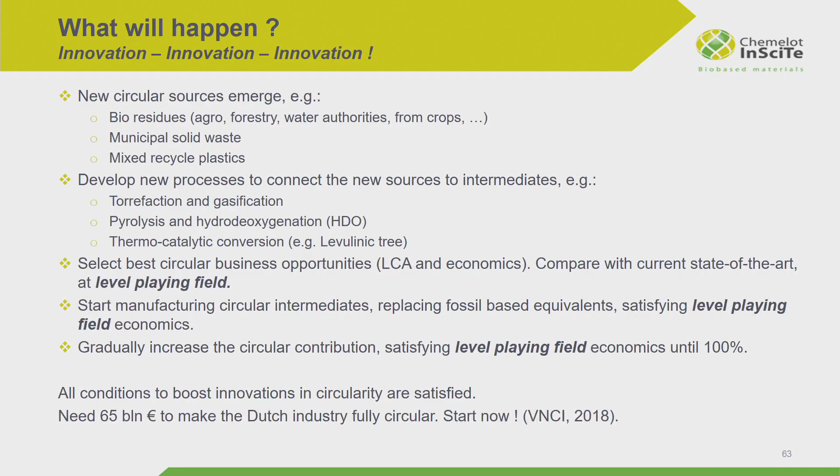Then start manufacturing circular intermediates, replacing fossil, again level playing field, and gradually increase. So it is gradual, it's not a one-time thing. And then you can go to 100%. So all conditions to boost innovations are satisfied. I mean, we have the people in place, we have the knowledge in place, Holland is a very knowledgeable country, I would say, Europe too, by the way.

But except for one thing, in my opinion, we need innovation financed. And innovation is not only doing experimental lab scale, but also piloting, building plants, scaling up, and making the economy really boost. This requires, according to the chemical industry of Holland, about 65 billion over the coming 30 years. You could say, well, that's a hell of a lot of money. I'm saying, no, not at all. It's only 2 billion a year, which is less than 1% of our gross domestic product, which is, I think, a no-brainer.

So again, going back to the level playing field, what is now a level playing field CO2 price? Nowadays the CO2 price is around 30 euros per ton, right?

Is that a level playing field? Answer is no, but I will show you. But how to calculate it? That's why I like to use this example.

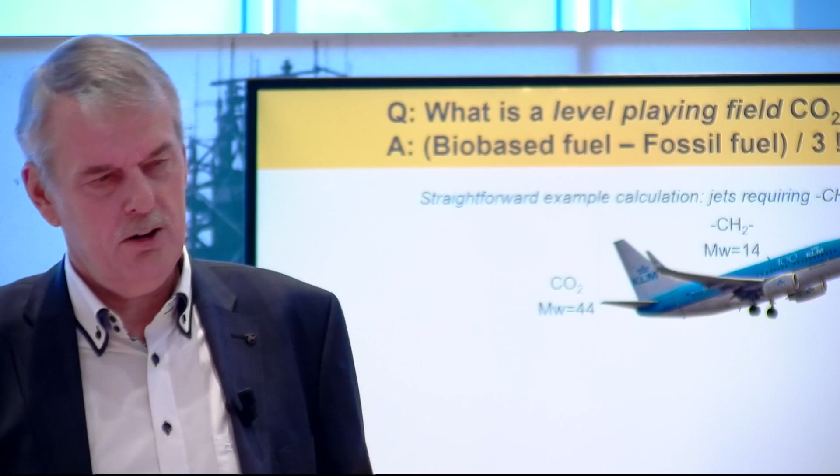An airplane must fly on liquid fuel. There's no way around it. I think everybody agrees. Fuels should be taken up in the air, must be light, etc., energy intensive, meaning it is CH2. It is kerosene. Kerosene has a molecular weight of say 14, CH2.

They make CO2 out of this. It's 44. 44 over 14 is about 3. Now that's where the footprint of 3 of oil comes from, because of this ratio.

So if you are using mineral oil, you make jet fuel out of this. You're talking typically from $40 per barrel to 400 euros per ton, the blue entry. If you do this from biomass, which needs to be done if you want to make it green, then you start with 120 euro per ton for the commoditized feedstock, and you end up with about 1,000 euro per ton. The difference is 600 euro per ton.

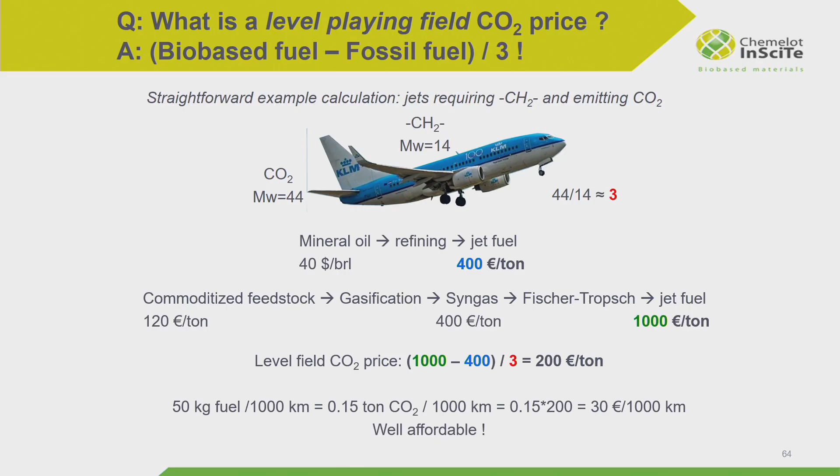You divide it by 3 because of this molecular weight, so the CO2 price at this level playing field is 200 euro per ton. That's about 7 times more than currently.

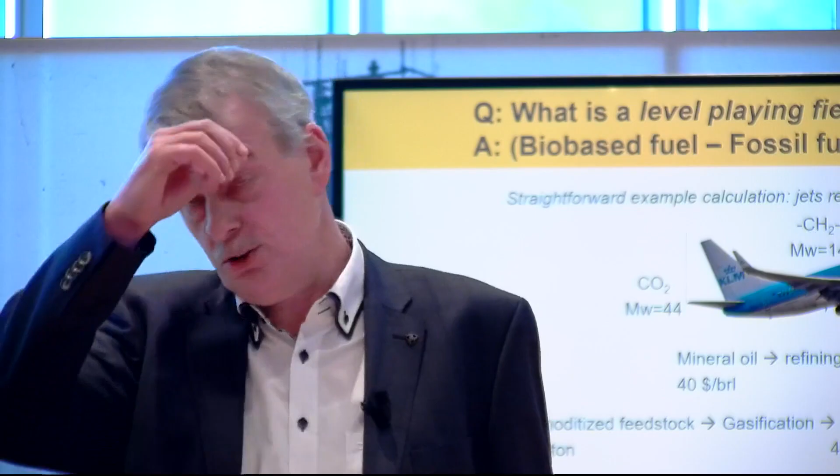So we know where we're heading to, and other countries do too. Canada is also very active on this. They already have, I've seen some publications with this kind of price. You say, well, that's a lot, because now flying becomes a lot more expensive. I said, well, of course it will become expensive, but I think it is also very affordable.

Think about 30 euro per 1,000 km more because of the CO2. And that's only level playing field. So if you would like to boost your biobase, you should really go beyond level playing field, making biobase very attractive. So what can we do?

I would say join forces and collaborate. Find owners driving this transition. Provide supporting, stimulating means for this. Make this level playing field happen. That requires some policy decisions, preferably globally, but at least in the EU, I would say.

Develop competitive biorefinery concepts with maximum value creation. Now the technologists among us have a nice assignment there. Give these bulk intermediates a constant quality, availability and price. And of course minimize energy consumption and involve society in all steps.

I could have a whole story about Staatsbosbeheer and Greenpeace, but I think it's very good to have them on board. So, finally, just join forces and walk the talk.